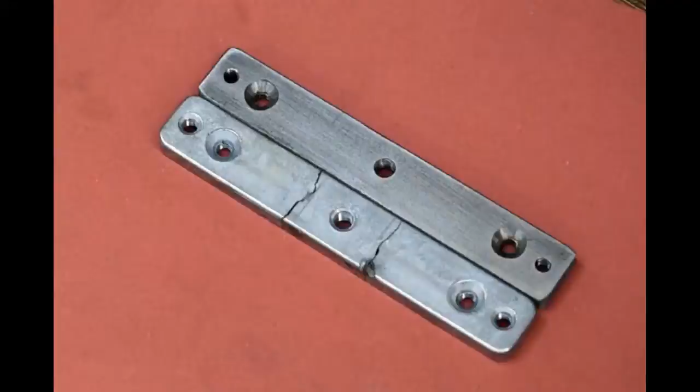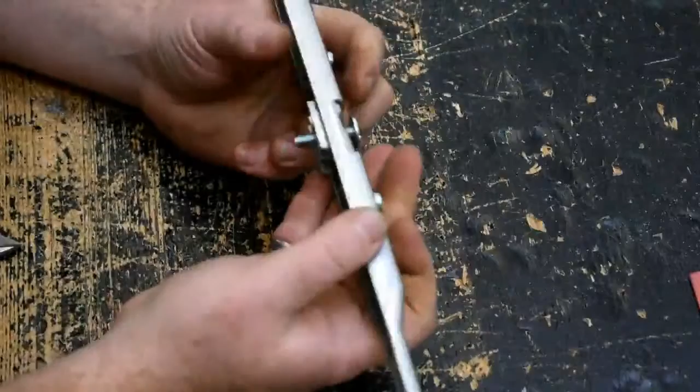Hi, welcome back. A friend of mine asked me to fix up this piece here. It's a frame or part of the frame for a kitchen cabinet. This piece attaches to the door, and then the basket type of thing attaches to this.

The piece is broken into three sections. The middle section seems to have been bent out of it, so he just asked me to make it up again. I thought it might be reasonably interesting to show this, especially to kids, to show the process of fixing up something.

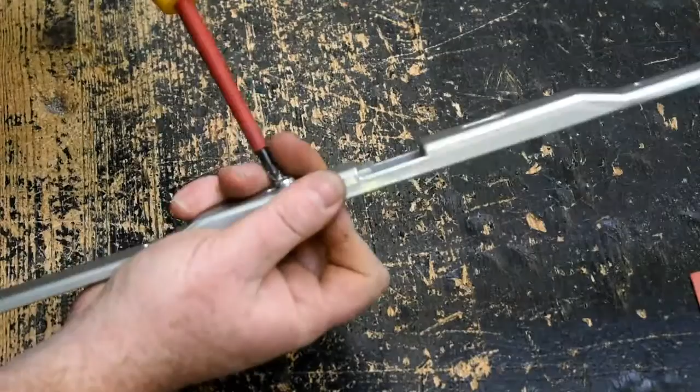It's made out of aluminium. I don't have aluminium this size, and it obviously didn't work. So I'm just taking it apart now, taking out the screws, and I'm going to probably make it out of steel.

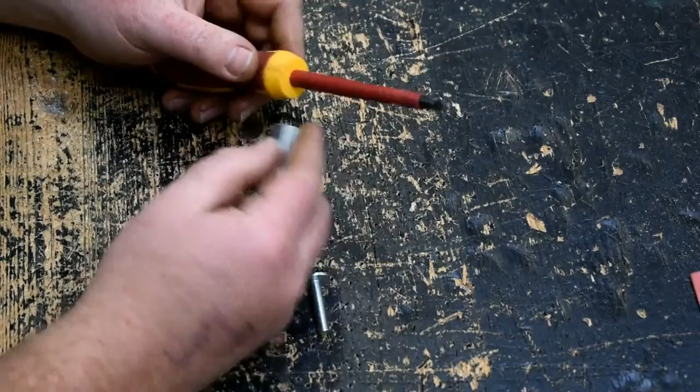Just going to get the dimensions first of all. So 3 sections, as you can see, and we have a total of 5 holes to drill. These ones here are M4 countersink—are they M4? No, they're M5s, 2 countersinks. These are just regular panhead screws, and this is an M6. I'll double check with the verniers. Yeah, that's 6mm. So I need taps for those and drills for the right size hole.

So this is how the piece fits together, a piece of aluminium. It's hollowed out on the back, so it's been cast in this shape. I won't be doing casting, obviously—I'm just going to make it out of a raw piece of steel. I could hollow out those sections on the milling machine, but I don't think there's any necessity. The weight isn't going to be that huge or important.

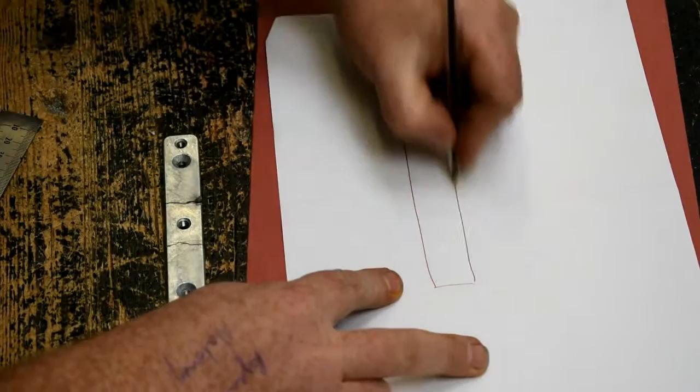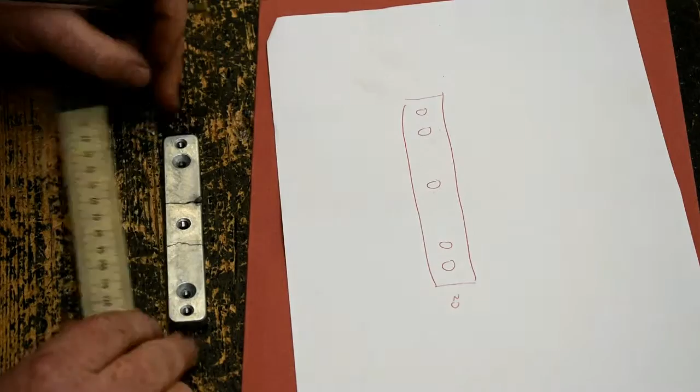So I suppose the first thing to do is to measure it. I'll take down some of my measurements in a rough fashion. So a rectangular piece, we have a hole in the middle, and 2 holes here and here. The width of the piece is 20mm. The length, when it's all together, is 120. I'll turn this so you can see it now when we've got the measurements properly done.

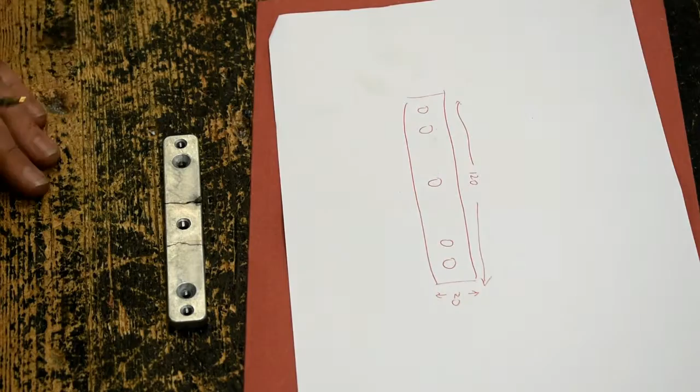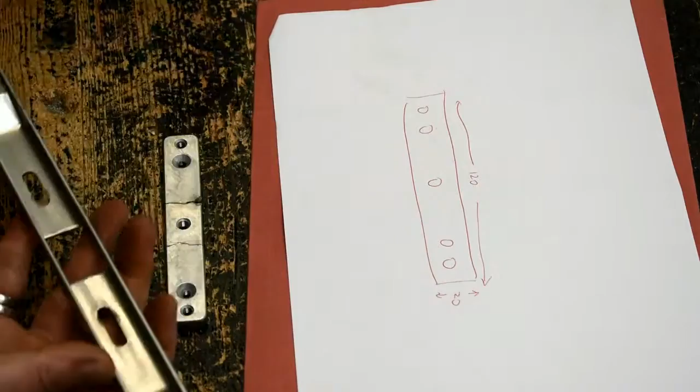Now the piece—I did look at this beforehand. The piece of steel I found was this here, a bit of old bright mild steel. It's 19mm by 6, so I don't think 1mm is going to make a huge difference when you put it in there. Yeah, it's loose enough. It seems to be about the same width—I don't think the millimeter is going to make a difference that way.

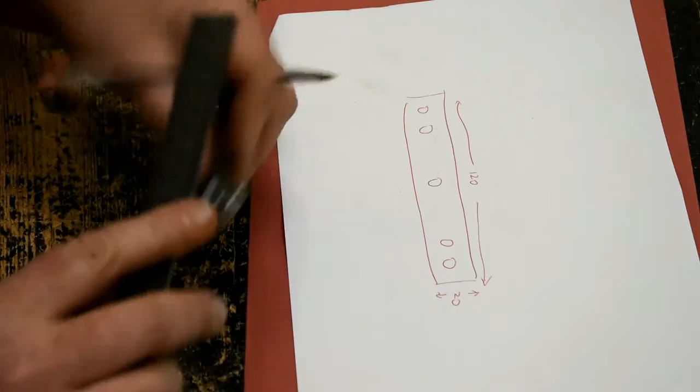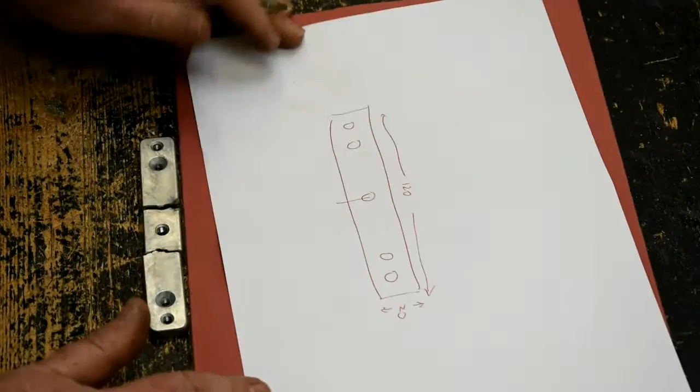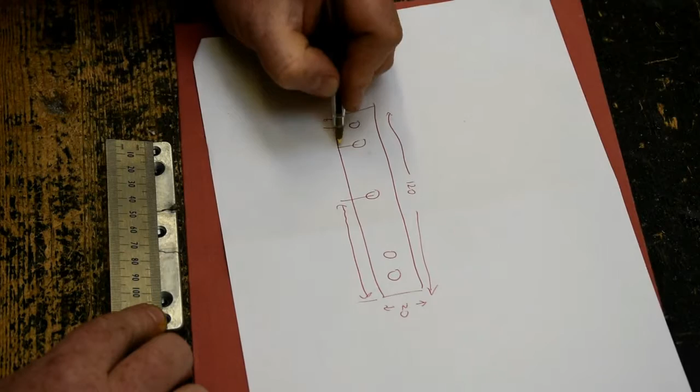And I looked at it this way as well. It's actually 6.5mm thick at that point, and this piece of steel is 6mm thick. Again, I don't think these are critical dimensions—they're not going to make a huge difference. This hole down is going to be 60 down from the end, and the other 2 holes are going to be the same. I'm just going to measure one side, and then it's mirrored on the other side. So the first hole is in 6mm, and the second hole is at 18mm in total. So that's pretty easy there then.

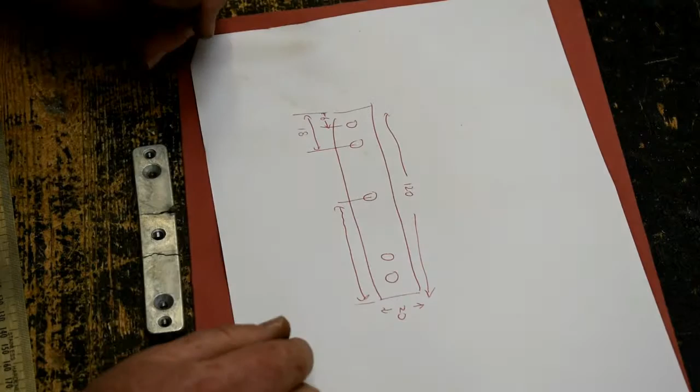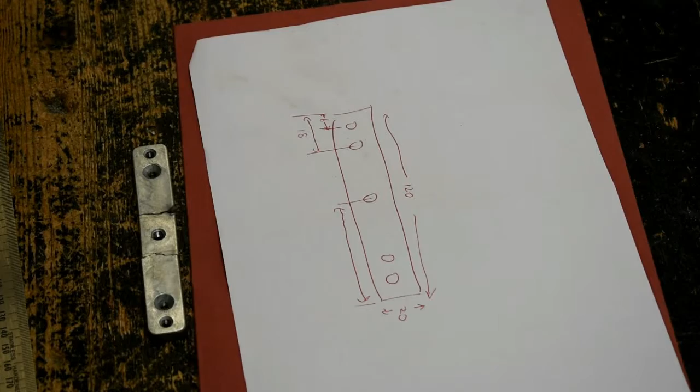Right, I'm not going to do much talking in this video—just going to basically do it and film doing it so you get an idea, but the main things are there. I have my taps sorted now, an M5 and an M6. I have my drill bits—for the M5 I'm going to use a 4.2, and for the M6 I'm going to use a 5mm drill bit. So I'll get started and fast forward when it's boring. The first thing to do is to cut the steel.

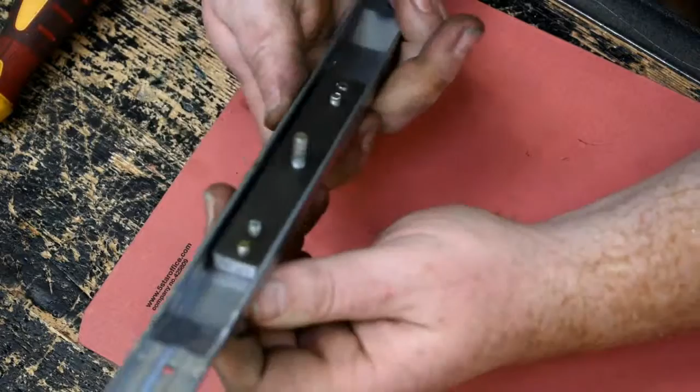So there we go. Piece is done, piece is in. It's not perfect, but I think it'll do the job.